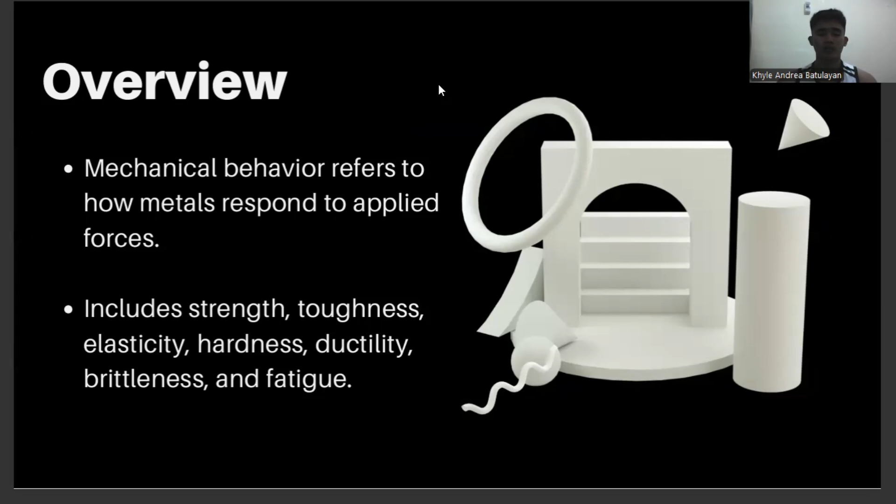Mechanical behavior of metallic materials. Mechanical behavior refers to how metals respond to applied forces. Includes strength, toughness, elasticity, hardness, ductility, brittleness, and fatigue. Strength. Strength is the ability of a metal to resist deformation. Types include tensile, compressive, shear, and yield strength.

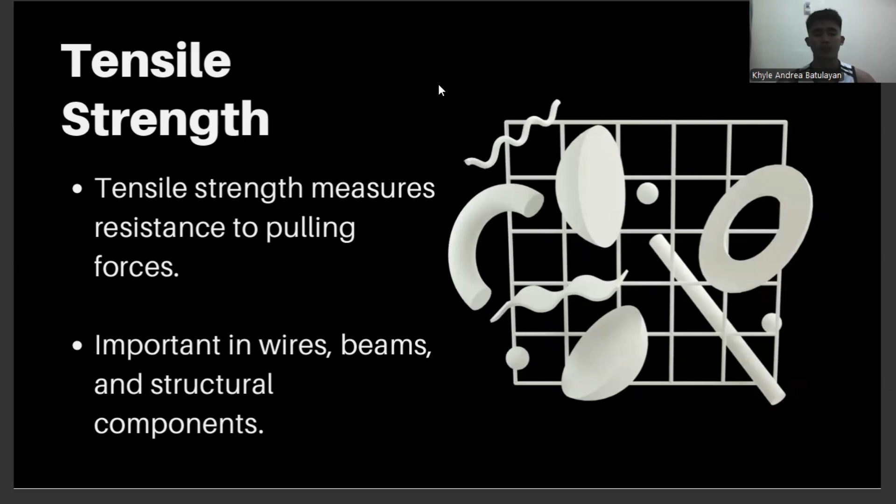Tensile strength. Tensile strength measures resistance to pulling forces, important in wires, beams, and structural components. Compressive strength. Compressive strength measures resistance to crushing forces, common in columns, supports, and foundations.

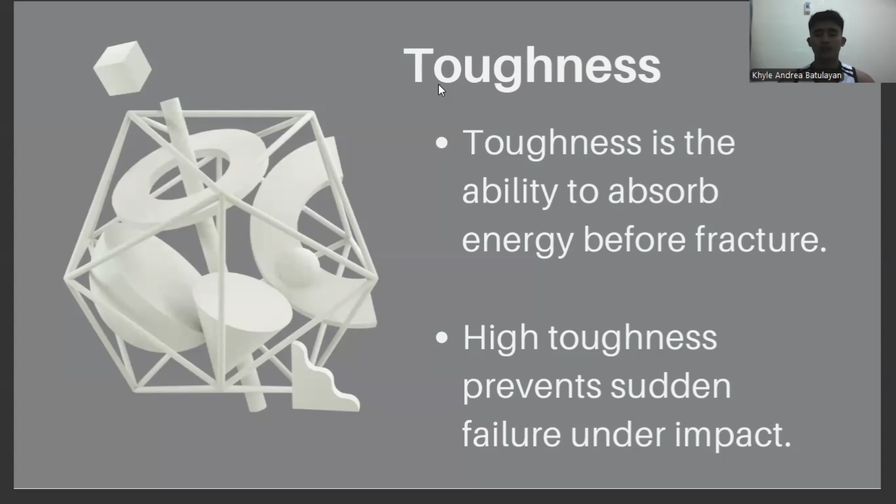Toughness. Toughness is the ability to absorb energy before fracture. High toughness prevents sudden failure under impact. Elasticity. Elasticity allows a metal to return to its original shape after stress, measured by modulus of elasticity or Young's modulus.

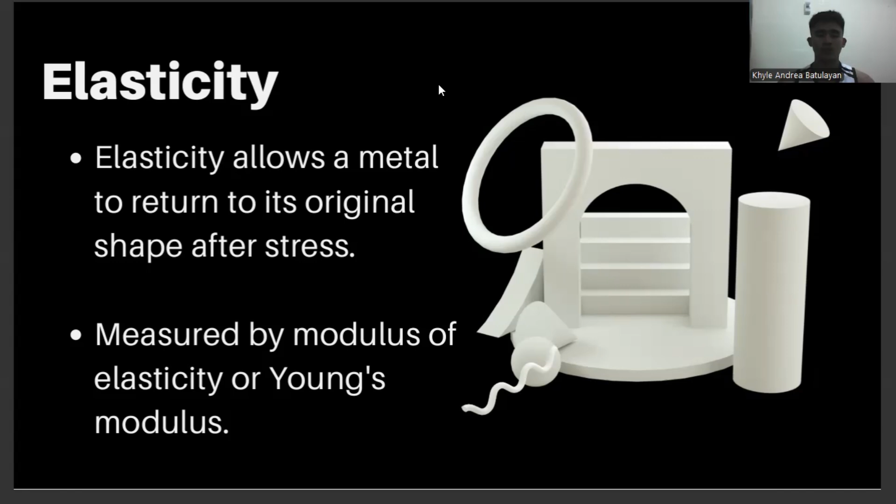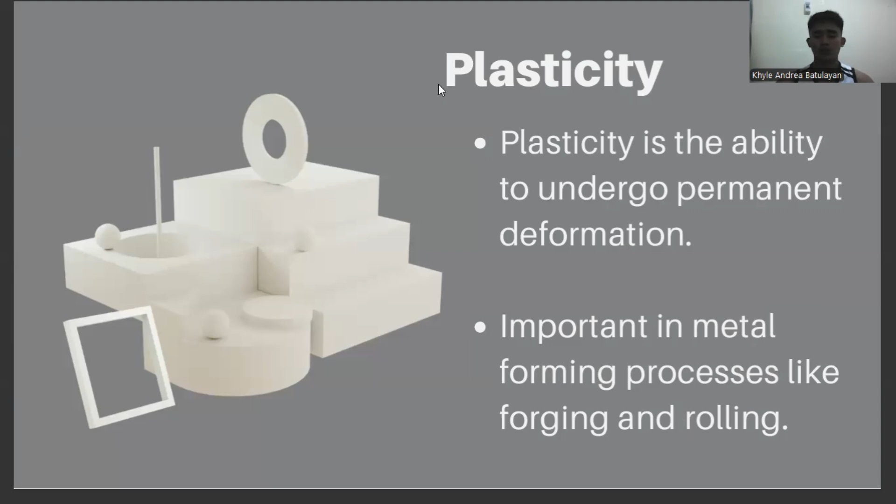Plasticity. Plasticity is the ability to undergo permanent deformation, important in metal forming processes like forging and rolling. Hardness. Hardness measures resistance to scratching and indentation. Tests: Brinell, Rockwell, Vickers.

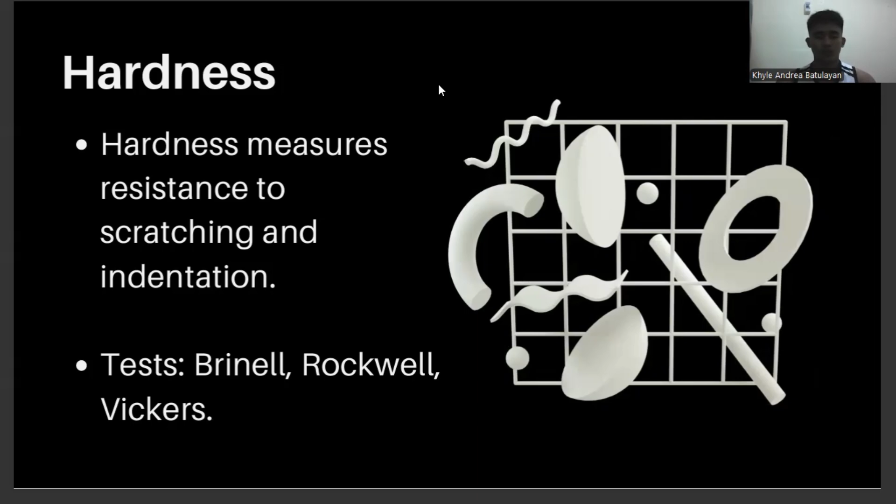Ductility. Ductility is the ability to stretch without breaking, important in manufacturing and shaping metals. Brittleness. Brittle materials break suddenly with little deformation, common in cast iron or metals at low temperature.

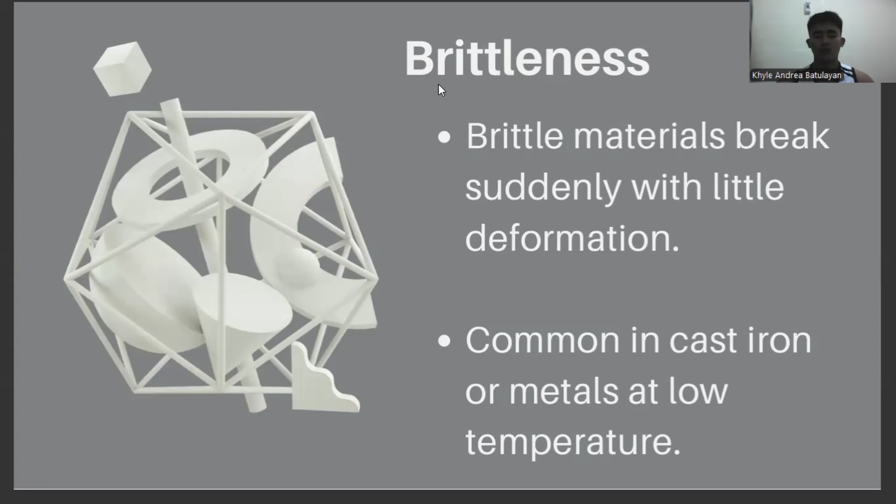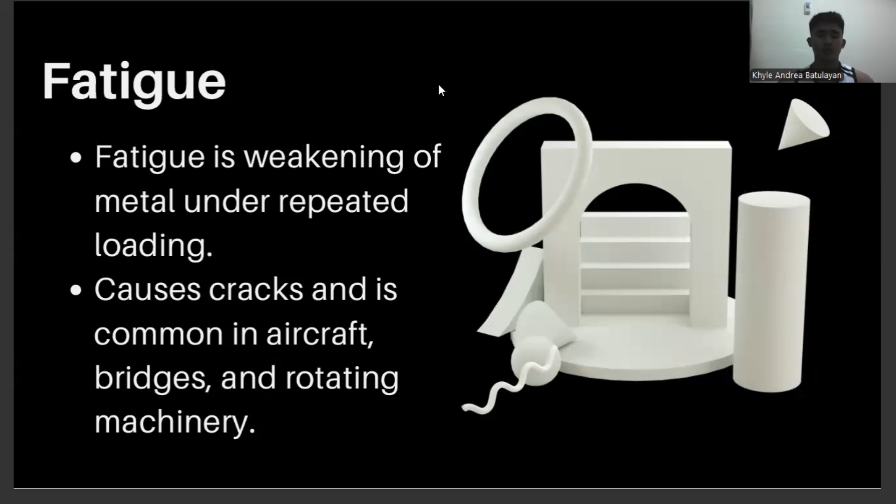Fatigue. Fatigue is weakening of metal under repeated loading, causes cracks, and is common in aircraft, bridges, and rotating machinery. Creep. Creep is slow deformation over time under constant stress. Occurs at high temperatures in turbines and boilers.

Summary. Ang major properties po ng report na ito ay strength, toughness, elasticity, hardness, ductility, brittleness, fatigue, and creep. These help engineers choose appropriate metals.